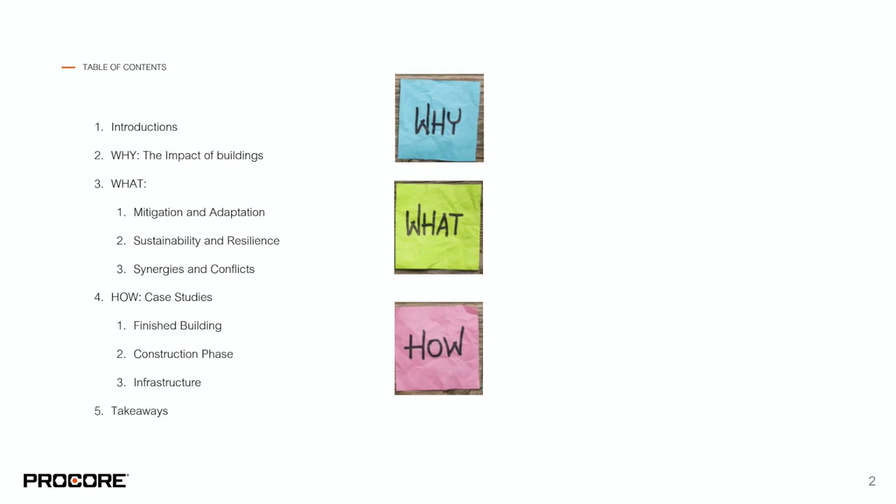We're excited to be here to discuss resiliency and sustainability. Our agenda will include brief introductions about ourselves and our companies. We'll talk about why speaking about sustainability and resilience and discussing these topics is important. We'll define sustainability and resiliency, synergies, and conflicts between them. We'll discuss case studies that exemplify incorporating sustainability and resiliency in them. And then we'll move on to takeaways and conclusions.

My name is Monika Serrano. I am a mechanical engineer by trade. I've worked in the construction management industry for 17 years in different capacities. Half of that time has been spent in the field. Half of that time has been spent in pre-construction, cost, and engineering project teams.

I developed an interest and later a passion for climate change in the last few years and quickly realized that I wanted to spend the rest of my career making sure the built environment was not contributing to climate change. I am aware I probably will spend many years, if not decades, making this happen, but I'm happy to report that for the last 2 years, I've had a full-time job trying to make our buildings resilient to climate change

and other disruptions. I work for Turner's headquarters sustainability team, and I lead our resiliency program, which includes the resiliency of the buildings we built, our operations, and our workforce. Turner Construction has been around for 100 years. We have 45 offices in the US, more than 6,000 employees in the country, and up to 10,000 employees globally.

We're mostly construction managers, but about 10% of our projects are design built. We build anything but roads and bridges. We build large buildings, but also perform plenty of interior renovations. We build and renovate hospitals, data centers, schools, stadiums, airports, community centers. Our clients are both private and public.

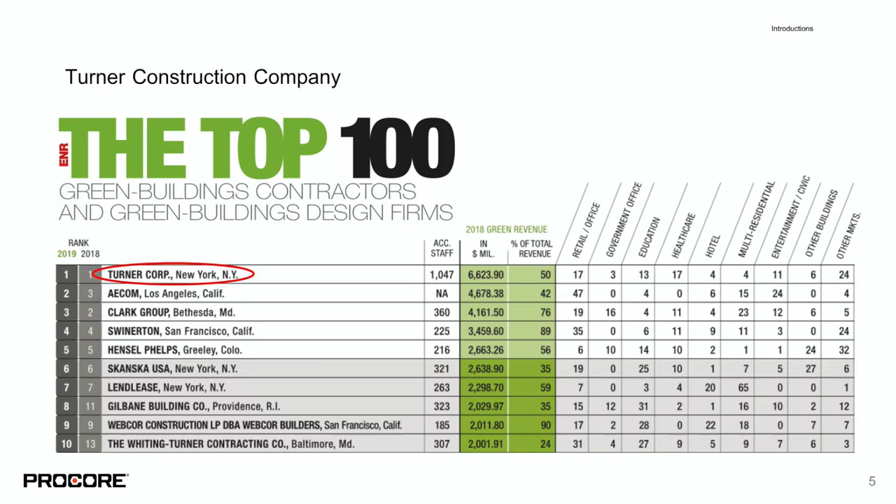But a few years ago, we realized that if we take away all of those green buildings, we didn't have much left in terms of sustainability. So we accelerated our efforts. Our headquarters sustainability department grew. We launched our Turner 2030 goal, which consists of decreasing our greenhouse gases emitted during the construction phase by 50%

by 2030. We placed a big focus on resiliency, even putting a full-time person dedicated to the topic, as well as dedicated attention and resources to other topics like embodied carbon, waste, net zero, and renewables. This is not just coming from us, it's also being driven by clients who are increasingly asking about these topics and putting value on sustainability and resiliency.

I am Ricardo Medina from Simpson, Gumpertz and Heger. I'll tell you a little bit more about SGH in a few minutes, but I am a structural engineer by training. I work at the Engineering, Mechanics and Infrastructure division of our company. And outside of SGH, within the infrastructure resilience space, I'm a member of the Executive Committee of the American Society of Civil Engineers Infrastructure Resilience Division, as well as a founding member of the ASCE Structural Engineering Institute Resiliency Committee.

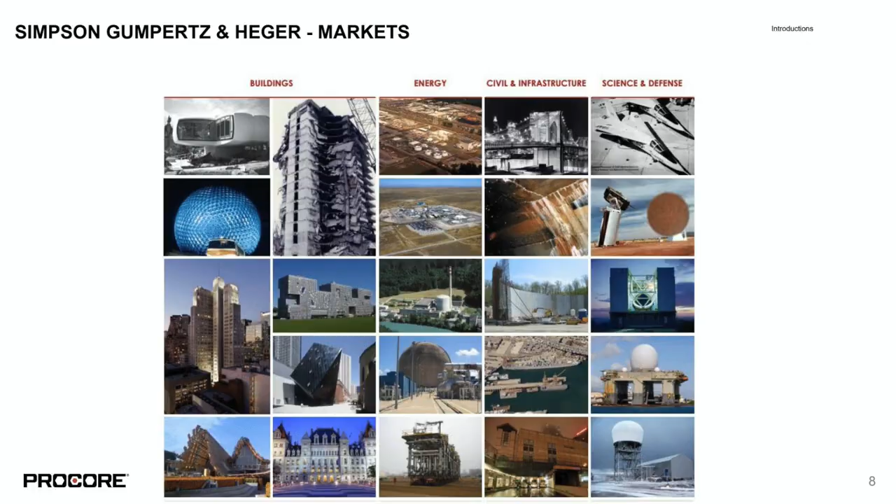Now let's talk about why it's important to discuss sustainability and resiliency. It is estimated that over the next 35 years, 2.5 trillion square feet will be either renovated or built. This translates to saying we're going to build another New York City every 35 days. Another New York City every 35 days. That's a staggering number, which is great news for the construction industry. This means that we're all going to be very busy.

For future individuals, this may have additional meanings. The impact that buildings have on our day-to-day lives is convoluted. We spend 90% of our time indoors. So in theory, buildings should affect our lives positively. But we have not historically designed and built buildings with this in mind.

And in our defense, there was a lot of information that we didn't know. There's information like toxicity of materials, the need for us to move during the day, the need for us to have good air quality, and the need for buildings to keep us safe.

There's another challenge. In order to build and operate buildings, greenhouse gases are emitted. So let's dig into that relationship between greenhouse gases and buildings. Greenhouse gases are usually referred to in the unit most commonly used to measure them, equivalent of CO2, and that's why you can see CO2 in the graphic on the slide.

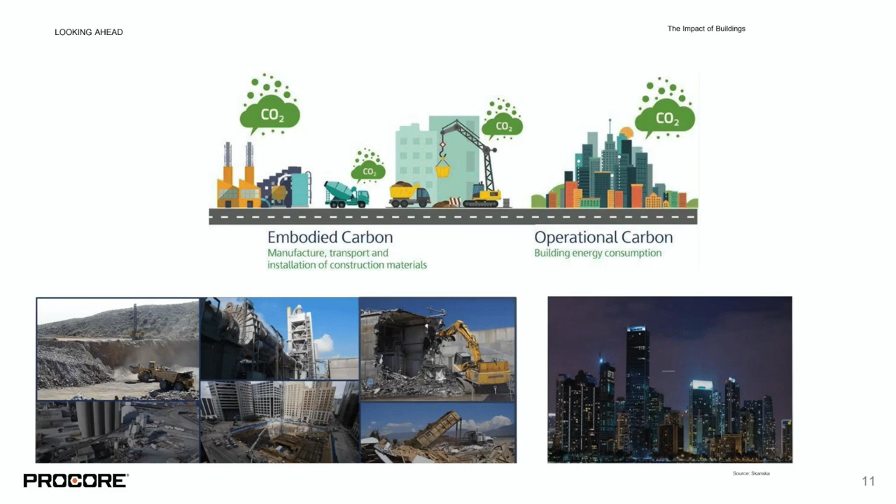As an industry, the building industry emits or is responsible for at least 49% of greenhouse gases emitted globally. This breaks down into about 28% that comes from building operations and about 21% from building materials.

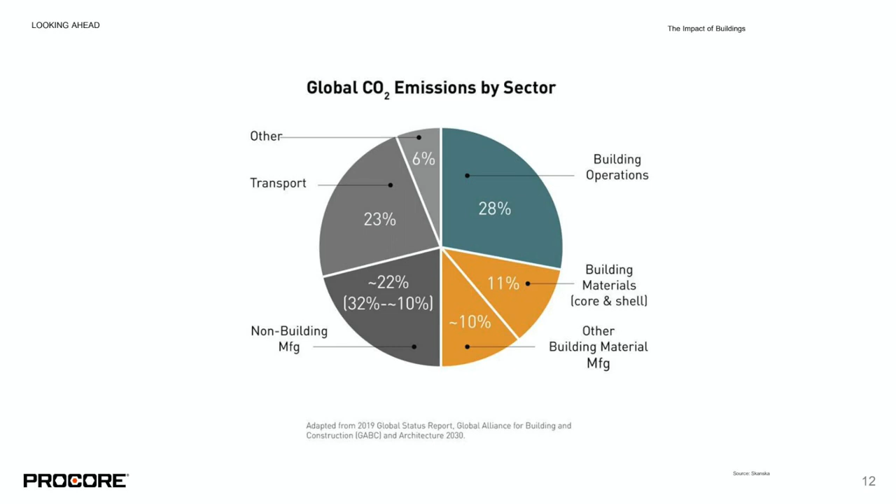Keep in mind that as buildings become more efficient, and they are becoming more efficient, that piece of the pie in teal will become smaller, and greenhouse gases coming from building materials will become bigger. The bottom line is that we construction folks are responsible for a lot of the greenhouse gas emissions. And why should we care about greenhouse gases emitted?

And let me clarify that greenhouse gases are not all bad. The existence of greenhouse gases in our atmosphere is what allows us to exist as a species. But in the last 80 years or so, the levels of greenhouse gases have increased to unprecedented levels.

And there is a relationship between increase in greenhouse gas levels in the atmosphere and increase in global temperatures. And then there's a direct relationship between increase in global temperature and extreme weather events intensifying and being more repetitive.

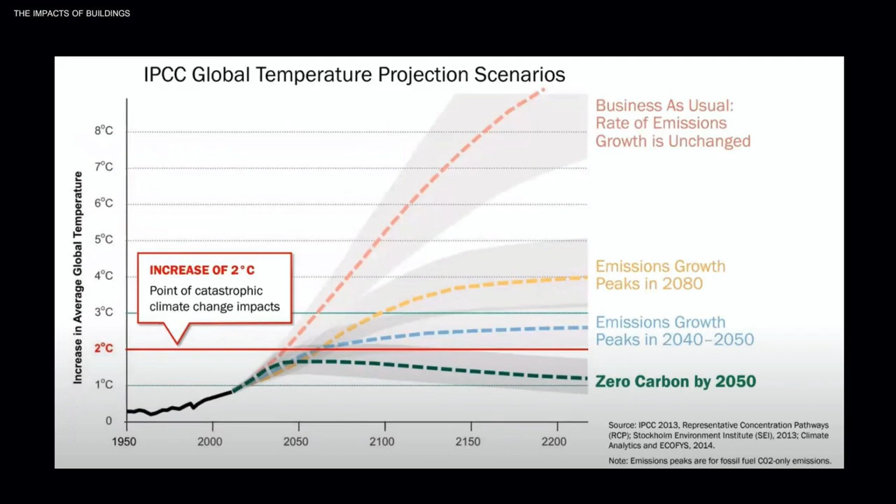And again, this is important because greenhouse gas concentrations increase, temperature increases, and if temperatures increase in the atmosphere, extreme weather events intensify and the frequency also increases. We're already seeing it now. The wildfire season is longer. Wildfires are threatening the west coast of the US and many countries around the world. Our air quality is being affected.

In the last few months, floods have affected the northeast of the US, Germany, the South, Hurricane Ida hit New Orleans. Last year, we ran out of alphabetic letters to name hurricanes. And extreme heat is a threat. Heat waves have hit the northwest of the US and Canada, and droughts are threatening California and the Midwest. Along with these disruptions come consequences like utility interruptions and water shortages, which affect agriculture and our food production.

The IPCC report, issued in August this year, stated for the first time that some changes from climate change are irreversible. And what are we to do as members of the construction industry? What does this mean to us? What can we do? We suggest we transform the way we do business and use this global challenge as an opportunity. We are building at a staggering speed, so let's make some real positive change at that speed as well. Some folks are already doing it, and many of us have the knowledge and the ability to do it.

We could transform the way we build and operate buildings by incorporating mitigation and adaptation into the way we design, build, and operate buildings. Adaptation includes, for the purpose of this presentation, also preparedness and planning. Let's define mitigation and adaptation. Mitigation refers to reducing the levels of greenhouse gases in the atmosphere.

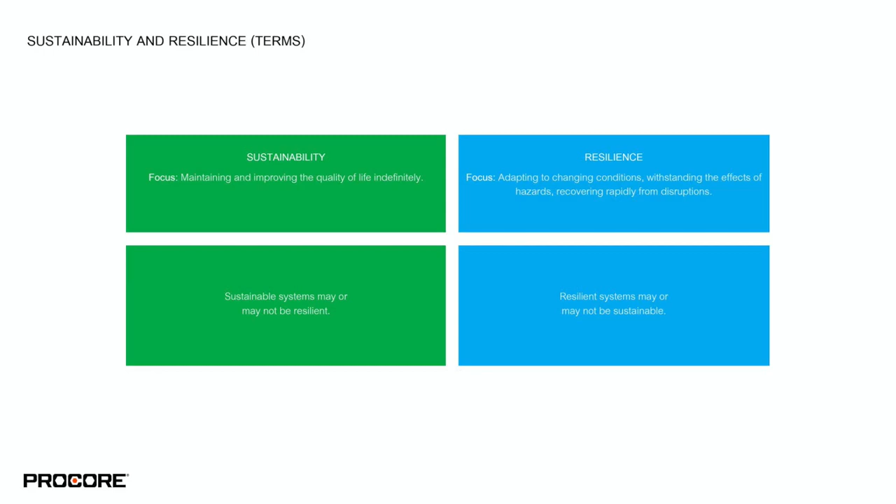So one could think of resilience as that attribute that helps maintain the dynamics of an infrastructure system or a network. At the same time, sustainable systems may or may not be resilient, while resilient systems may or may not be sustainable. Now, even though they're different, they're also synergistic.

For instance, sustainability is associated with concepts such as renewable, a complete service life of a facility, efficiency, reduced energy consumption, the use of recycled and reclaimed materials. When it comes to resilience, one thinks of robustness to withstand the effect of hazards, redundancy to serve the same purpose, dynamics in terms of preserving the dynamics of a system, recovery, operability, and functionality.

But what they have in common, both of them actually relate to community, the sustainability of a community, the resilience of a community. They both relate to systems and the interdependencies between systems. They both relate to resourcefulness, response, adaptation, environmental impact, and last but not least, diversity, inclusion, and equity.

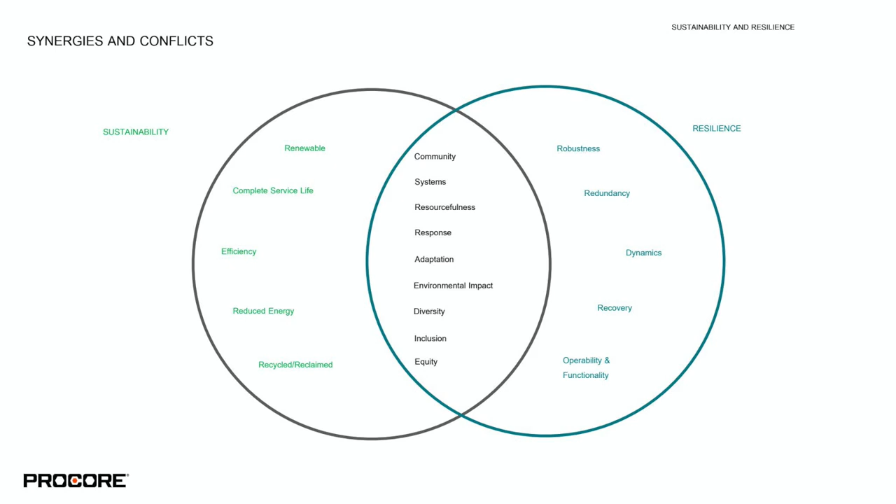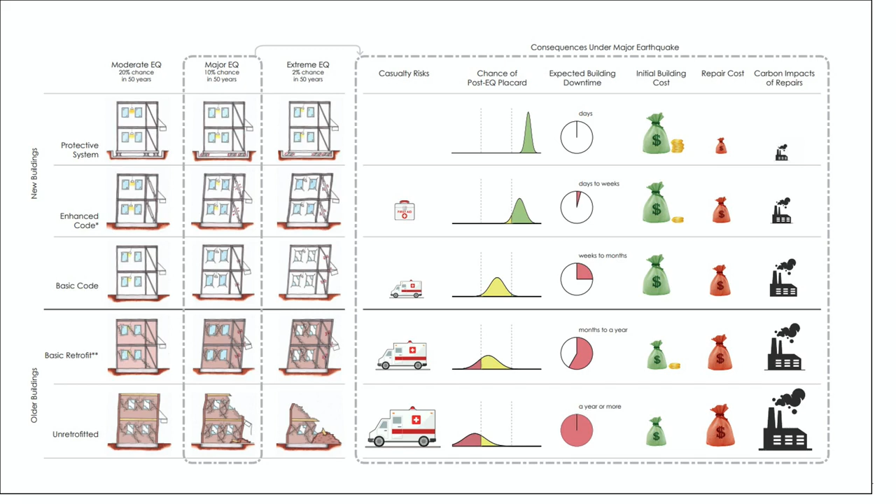Now, finally, if more robustness is added into the design and construction of the building, which is associated with following basic code or even enhanced code provisions or implementing protective systems into the design and construction of a facility, the expectation is that as the resilience increases, the carbon impacts of repairs will decrease, repair costs will decrease, and the expected building downtime will also decrease.

Let's now talk about how actual examples can show us that sustainability and resiliency can be incorporated. We'll go through three case studies: one, a finished building, one that is under construction, and one example will highlight infrastructure.

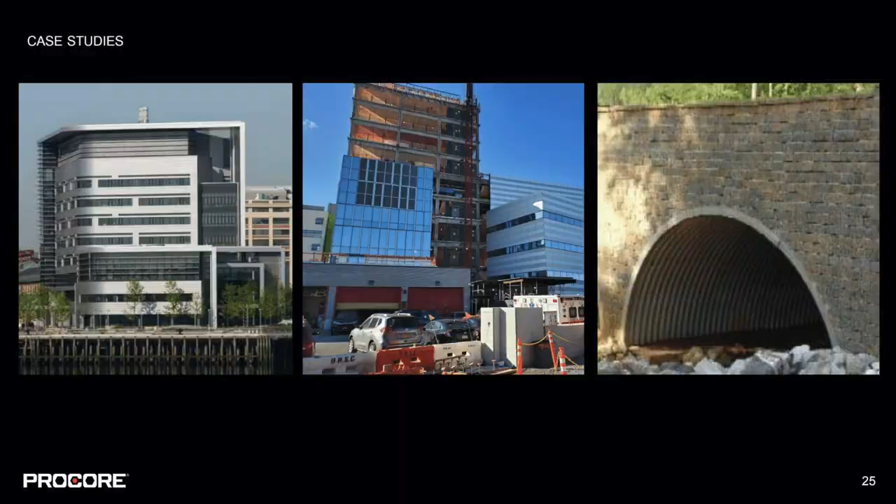The first case study is the Spaulding Rehabilitation Hospital. Disclaimer, this is not a Turner job. But you can learn more information; I'm going to give you two resources. I'm sure there are many. One is the ULI Returns on Resilience Study, and the other one is the US Climate Resilience Toolkit.

In 2005, Partners Healthcare, which is the client that built this building, purchased a contaminated brownfield and constructed a replacement for their current rehabilitation hospital. The hospital is located in the Boston Harbor, right at current sea level. And it opened in 2013 as an example of resilience to sea level rise and other hazards.

The first floor of this building is elevated 30 inches above the FEMA 500-year flood elevation. Side note, that is the elevation that floodwaters would reach during a flood so extreme that it has only a 0.2% chance of occurring each year.

Now, that is based on historical data, and future climate projections have shown that a 500-year flood elevation actually has a higher percentage of happening. Another explanation is that a 0.2% chance happens only in the first year of the building, and it compounds over time. Back to the building.

This elevation, the elevation of the first floor, was much higher than required by code. And Partners Healthcare also ensured that despite that elevation, there will be universal access for rehabilitation patients, which also shows another aspect of resiliency, making sure that everyone has access to facilities like this.

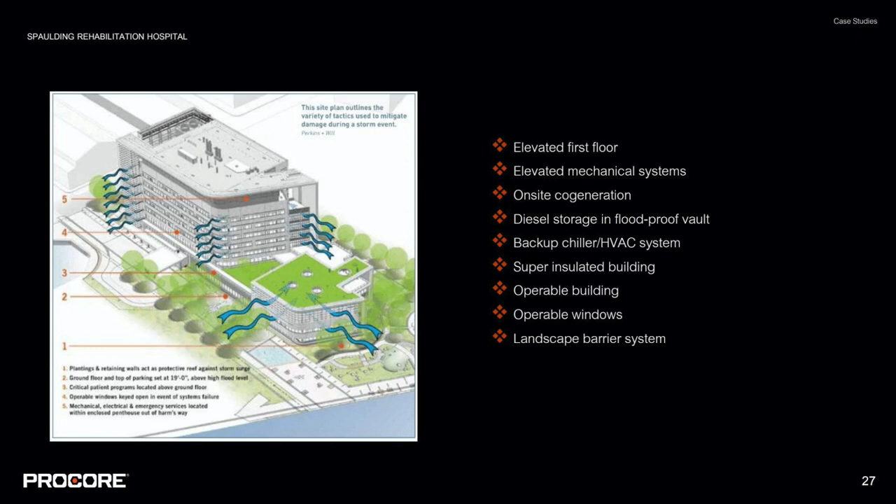The building envelope is super insulated with foam in the walls and triple pane glass in patient rooms, avoiding the need for baseboard heating, which is very common in Boston because of the cold winters. Around the building, there are landforms like swales and berms that act as a barrier reef and deflect waves from hitting the building directly. An example where sustainability and resiliency here have a synergy is that triple pane glass.

That's a passive strategy that keeps the building at a constant temperature. So imagine a summer day. It takes longer for the interior of this building to become hotter and have a need for AC. Similarly, in the winter, if it's really cold outside, it takes longer for the building to become very cold and need heating. This triple pane glass is also a resilient feature because it can deal with extreme temperatures. So there are synergies between sustainability and resiliency.

Now let's talk about that high voltage that goes all the way up to the roof and is encased in concrete. That's a resilient feature, but not really a sustainability feature. That encasement in concrete is a lot of resources. Concrete is very heavy in embodied carbon. So there, the designers have to sit down and say, okay, what do we give up?

Sustainability or resiliency. And that's really important to do when it comes to the design of a building: evaluate what are the priorities of the building? What's the building used for? What are the hazards? What are the risks? What's the downtime that a building can withstand and be okay with?

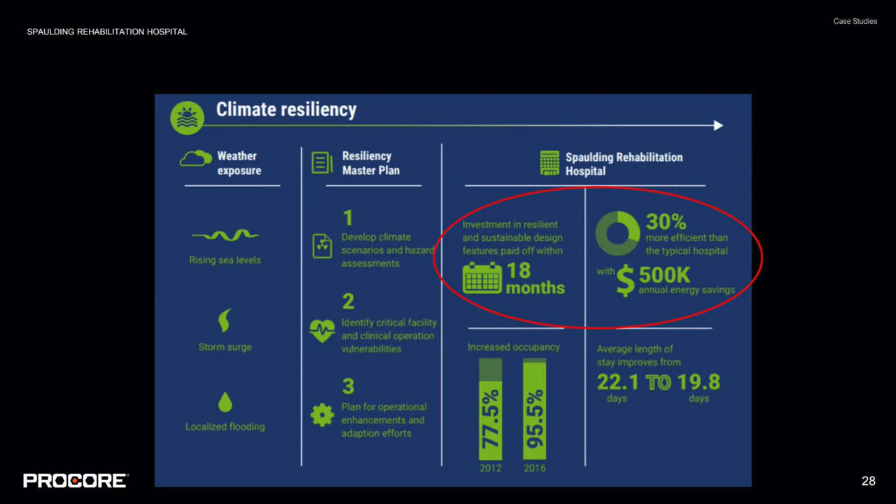The study called Safe Haven Study, published by Healthcare Without Harm and PricewaterhouseCoopers, also highlighted the Spaulding Rehabilitation Building. And it told us that the investment in resiliency and sustainability paid off within 18 months. This building is 30% more efficient than the typical hospital that just meets code. And every year, Spaulding has 500,000 in annual energy savings, again, compared to a building that just meets code.

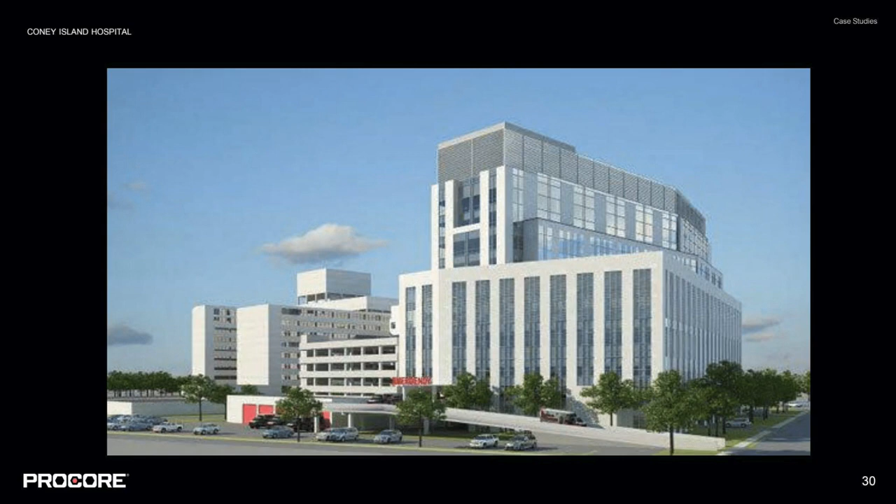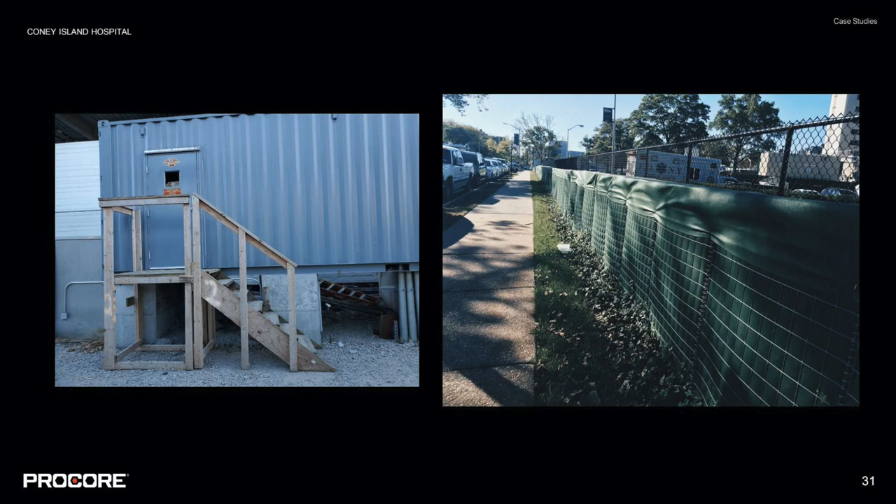As you can see, these solutions are not rocket science. They're simple, they're available, and they pay off in the life cycle of even the construction site. Our construction sites are vulnerable. Our workforces are vulnerable to the weather, and incorporating resiliency measures such as this can help us not affect the schedule, our workforce, and potentially our profits too.

Sustainability measures that were incorporated in this job site include water fillers distributed throughout the site to reduce water bottle usage and waste, light sensors in our trailers to reduce energy usage, temporary lights that were all LED, and a no idling mandate that we instill in all of our sites to reduce greenhouse gases emitted by vehicles during construction.

Let's move on to our third case study. Yeah, now let's talk about infrastructure, with the third case study being the culvert system. Now, this is a conceptual case study where the focus is on preventing the damage that you see on the screen right now. This was damage to a culvert system under extreme flood conditions, which clearly disrupted traffic on that particular roadway. Now, think about the disruption or potential disruption of traffic to the roadway network and to the

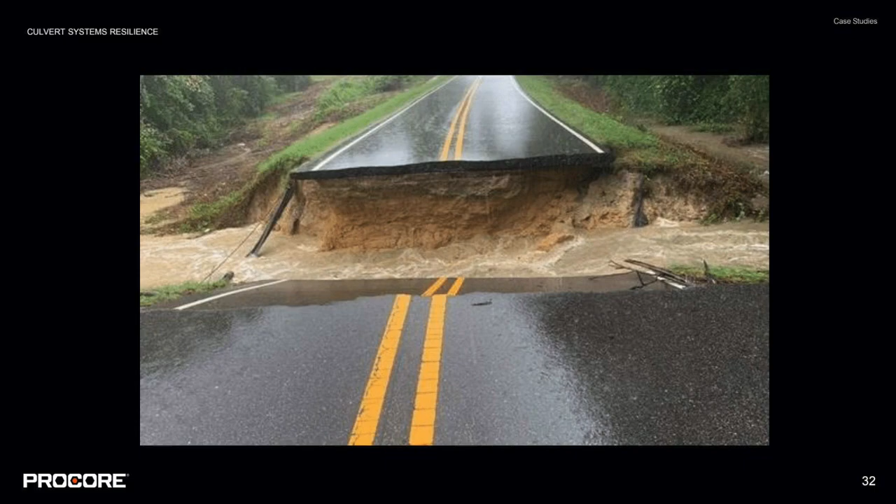So one of the things that can be done to prevent the failures of the previous slide is to strengthen and protect, to increase the robustness, the resilience of the soil embankment. Now, as designers, people have options. The embankment can be protected using materials that have higher embodied carbon. That could potentially provide a higher level of resilience at the expense of a lower sustainability by that particular metric.

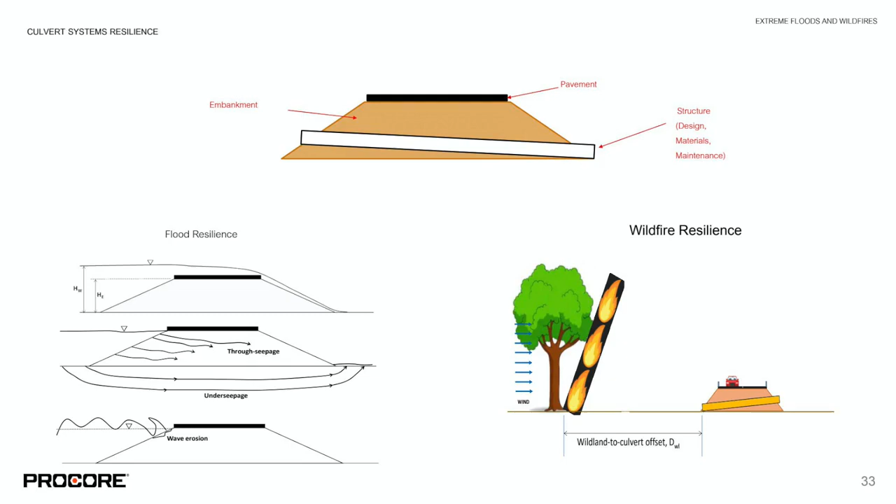Let's think now about the case of a wildfire in the vicinity of the culvert system. Disruptions could take place by virtue of the fact that the culvert structure may be damaged due to high heat. One alternative is to keep a certain distance from the culvert system to the wildfire front clear of vegetation. That is represented on the right-hand corner by that distance called the wildland to culvert offset. This implies more frequent maintenance to increase resilience at the expense of perhaps a higher carbon footprint. An alternative to keeping that distance with low vegetation is to actually build the culvert structure itself with high heat resistant materials, which could come at the expense of a higher embodied carbon on the culvert structure itself.

So as you can see, this is a conceptual example, a case study where sustainability and resilience could be at odds with one another, but one should take into consideration the whole life cycle of the project, and then it becomes a balancing act to account for both sustainability and resilience in the project.

Now, what are the takeaways of our discussion so far? First and foremost, sustainability and resilience are essential for our future on this planet. Secondly, they can often be synergistic, which implies that they can be incorporated without one compromising the other. We had the example of an earthquake and decreasing the carbon impacts of repairs by increasing the resilience during the design and construction of a facility. In some other cases, sustainability and resilience can be in conflict with one another, which was also demonstrated by the culvert case study that we recently discussed. This implies that incorporating both may require a balancing act.